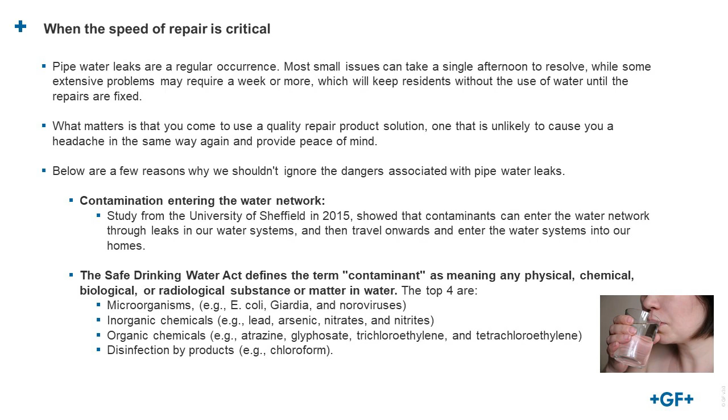Lost water services in your community is also an issue when the speed of repair is critical. Constant access to fresh water is one of the most important conditions for comfort in your home. When our water lines break in our community, it disrupts the entire community, as we are no longer able to use the water services in our homes that we take for granted, such as taking a shower or using the washroom. Sometimes these services don't get back online for hours, and sometimes even for days.

Having the correct quality restraint coupling repair system handy will help to be able to reconnect these water services and restore water back into the community and help bring the treated water back into your home. Every hour lost to repairs is revenue lost to the municipalities, as well as the revenue of the treated water that wastes into the ground before the repair is noticed.

According to the City of Toronto's website, there are more than 6,100 kilometers of water mains in the City of Toronto water distribution system, and the average age is 61 years. 9% are 80 to 100 years, and 15% are more than 100 years. Within the City of Toronto, there are 1,100 water main breaks annually, and it costs on average $10,000 to $15,000 to repair a normal water main break.

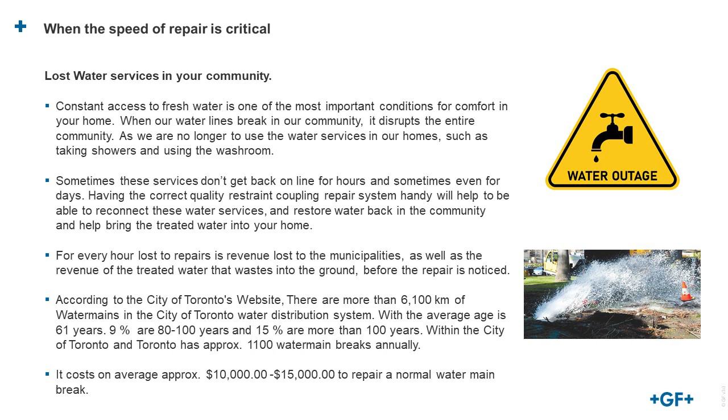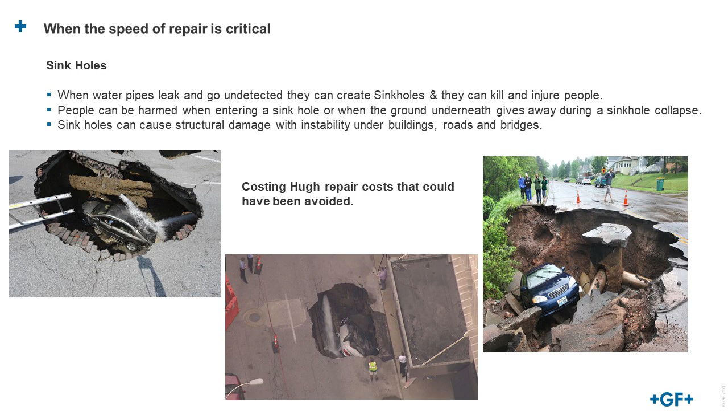Sinkholes are also a major concern. When the speed of repair is critical and it gets ignored, there's a chance that a sinkhole may appear underneath the surface. When water pipes leak and go undetected, they can create sinkholes, and they can kill and injure people. People can be harmed when entering a sinkhole or when the ground underneath gives way during a sinkhole collapse. Sinkholes can cause structural damage with instability under buildings, roads, and bridges. Any sinkhole will cause huge major repair costs that could have been easily avoided.

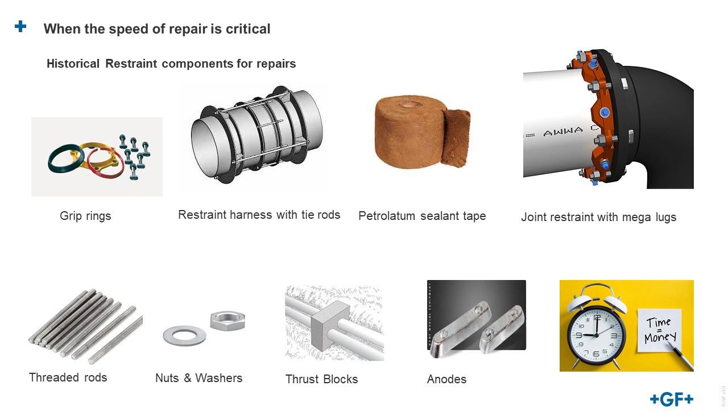Historical restraint components for repairs are typically a lot of components, such as grip rings, restraint harnesses with tie rods, joint restraints, petrolatum sealant tape, anodes, thrust blocks, threaded rods, nuts, and washers. Time is money, and all these components have a huge cost associated with them, as well as huge installation times.

However, our GF multi-joint restraint coupling is a one-piece restraint coupling system. We have a wide range to handle the different pipe material ODs. We have 16 degrees of angularity, 8 degrees per side, prevents axial movement and pipe pullout, provides an internal restraint, no need to disassemble before installation, allows dynamic deflection which absorbs ground movement, helps prevent future pipe breakage, and our system installs in minutes and not hours.

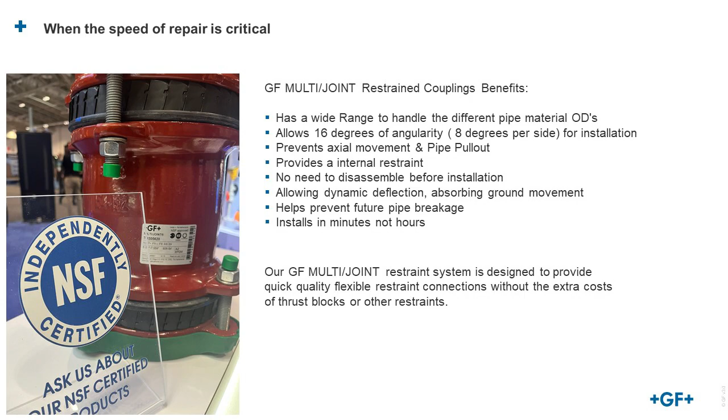Our GF multi-joint restraint system is designed to provide quick, quality, flexible restraint connections without the extra costs of thrust blocks or any other restraints. GF multi-joint flexible restraint system is our peace of mind solution. No matter the pipe material or configuration, GF Multi-Joint is your flexible restraint connection.